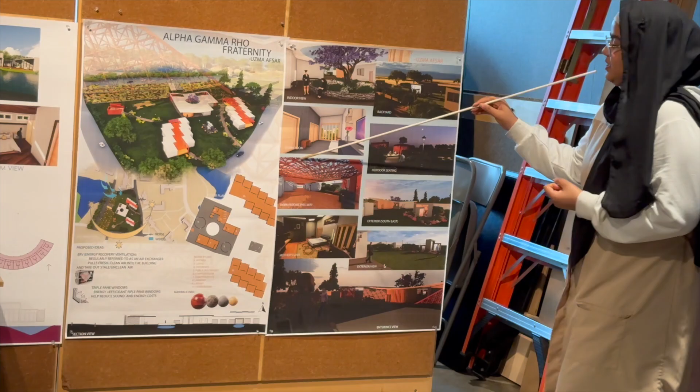So if you see here, this is looking out to the backyard. It's still an open concept with no doors, but at the same time it's closed enough so people can feel secure.

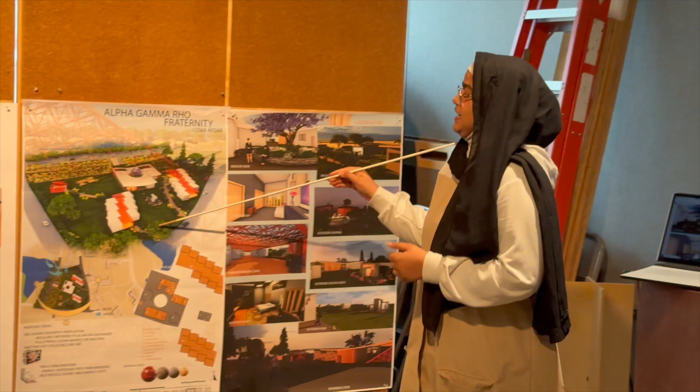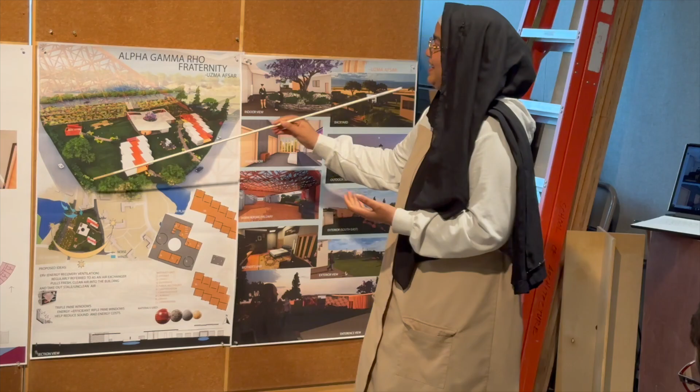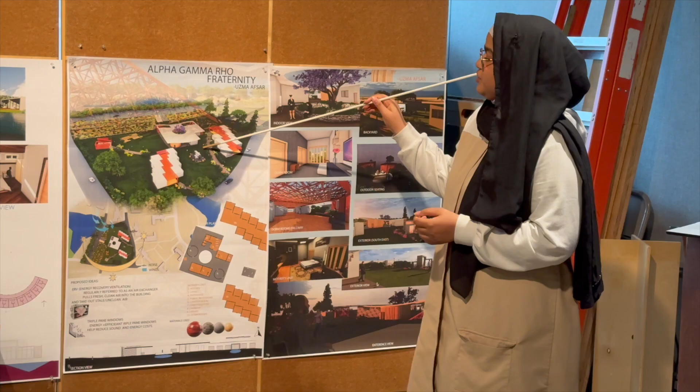With all this landscaping, I think it's hard to manage sometimes, so I also added compost bins here, somewhere I can't really see, but far enough so people don't complain about the smell. At the same time, it ties in with the gray water system we're already using.

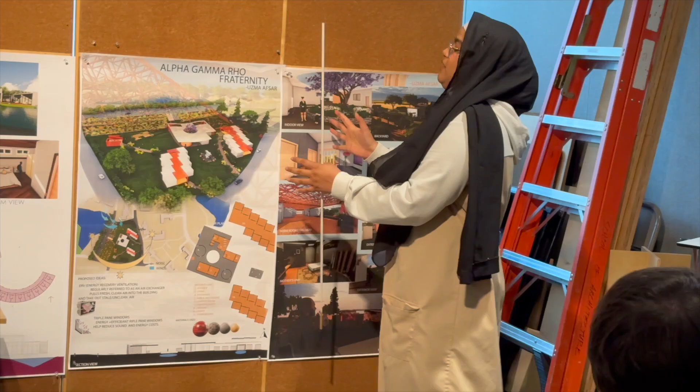Apart from this central courtyard, I wanted to create an outdoor seating area, which ties in with the same panels used up there for outdoor seating and events. It's a large space that can hold about 50 to 60 people, so it's a good way to separate from the whole structure and spend some time out there.

So these renderings are pretty dark here, but I think it's better here.

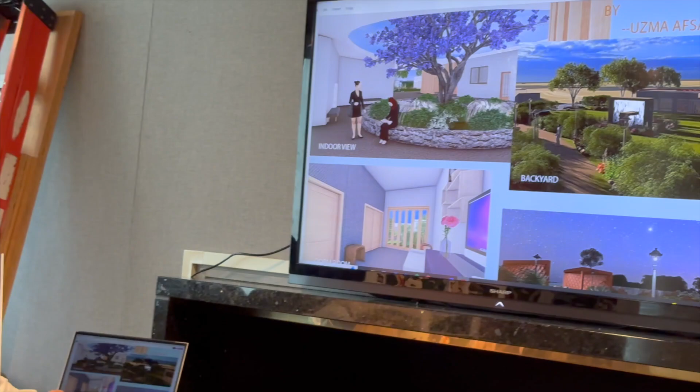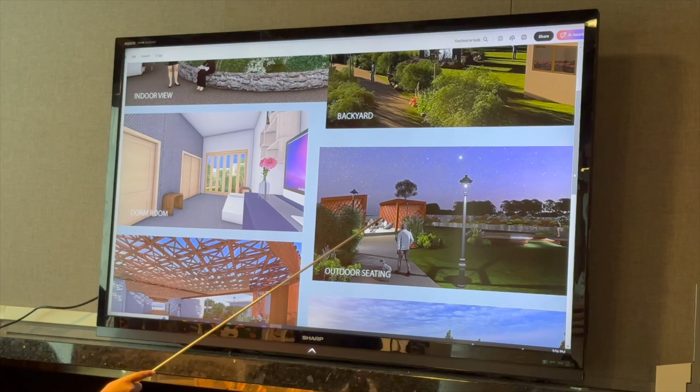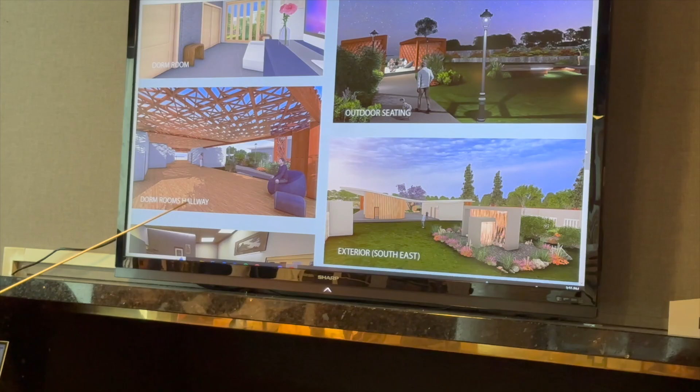This is a night view for the outdoor seating, which also has a snow roof on top with the same panels used throughout the buildings. This is how the hallway would look inside, same as outside. I think the geometric pattern, even though simple, creates nice shadows during summertime and sunsets—it's really aesthetic and without any extra cost.

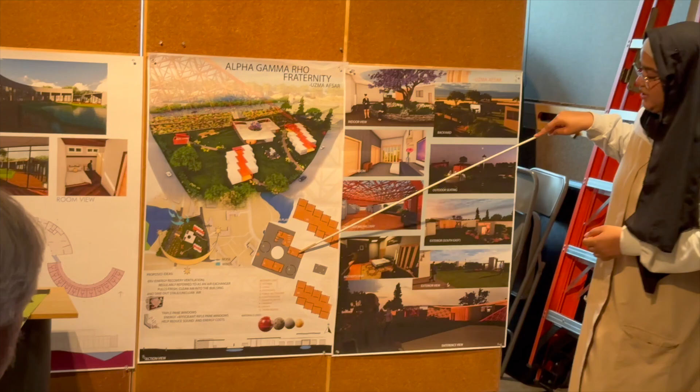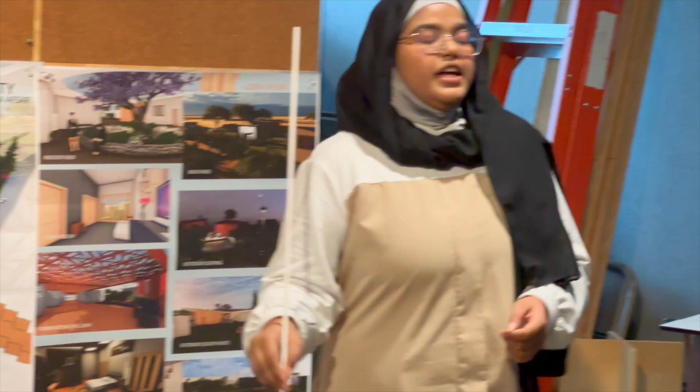This is the rendering of the mother's unit, which has two doors. I didn't use many windows here—just more foldable, open-style doors. So if you're inside and want to go out, you don't have to go all the way through; you can just go to the backyard. This follows through with the mother's unit here too, with two doors, and this is the interior.

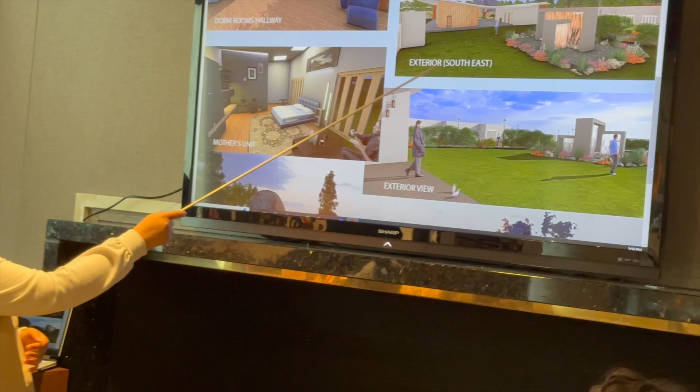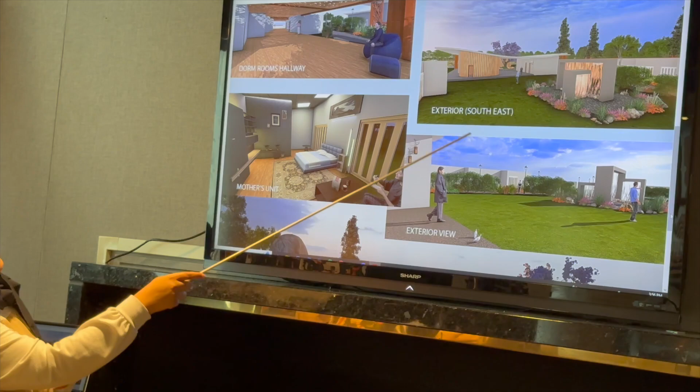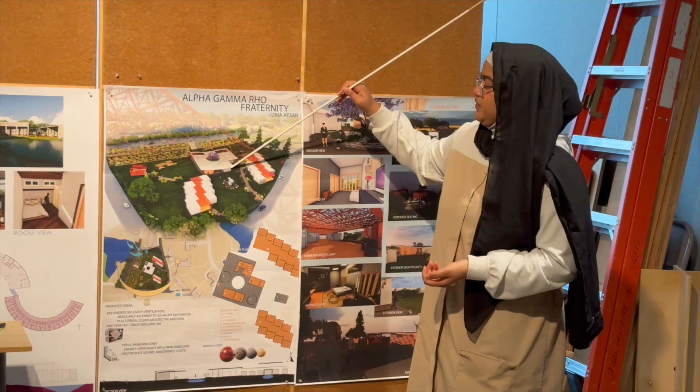That is the exterior view of the fountain and common spaces. I tilted the roof a bit because a single flat roof for all these spaces felt like too much, so curving it gives more drama. I also thought it would be a good idea to add solar panels on this side of the roof in the future, since most sunlight comes from here—that's a good angle for them.

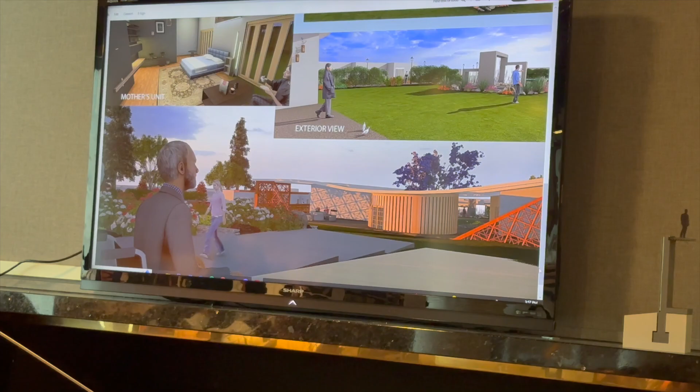This is a sunset view. As you can see, the shadows I mentioned create a nice drama here, without any extra cost.

So that is it. Any questions or comments?

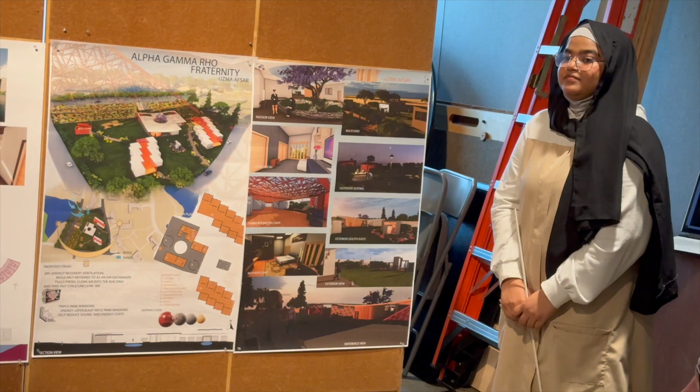Is this all open wood framing on the hallways? Yes, all of it—it's an outdoor space. I like the open nature of it.

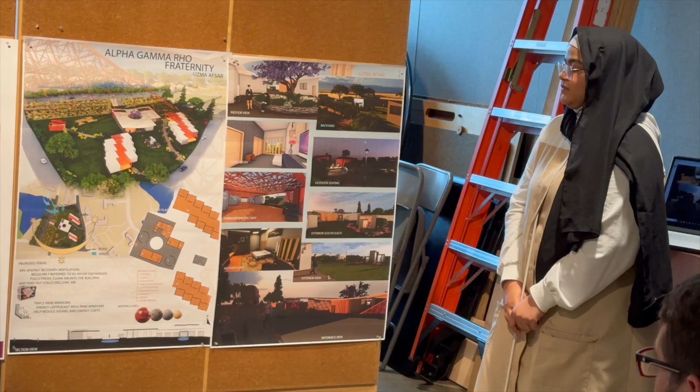One point I forgot to mention: all this area in between can be used as seating, and at the back there's a balcony for the living and dining area. If more people come into the dining area, opening this up would give extra space for more people to come in, but it's also outdoor, all the green spaces outside.

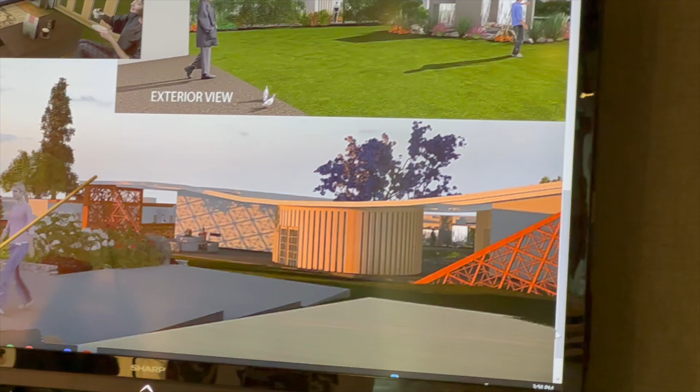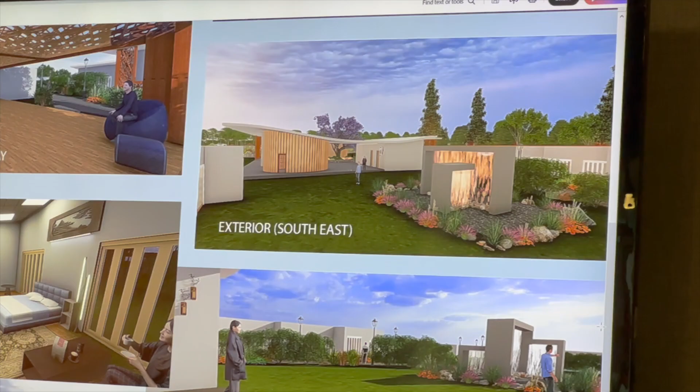This one? Yes, the roof is an overhang roof—you can see it here and here. It blocks some of the harsh sunlight coming into the building, but at the same time allows winter sunlight in, along with the winds I mentioned.

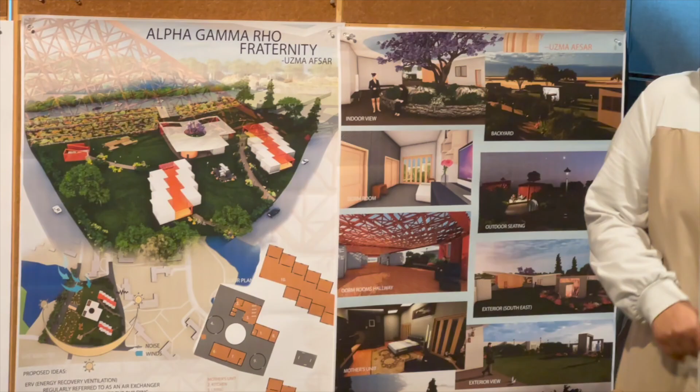During the warm weather, I think that's the problem. The summer will be hot. It could be, it's going to play a role. I think in winter most people won't go out as much anyway.

But having these open spaces does work to our advantage, letting winds come in instead of closing everything off. And the fact that they're not connected means you don't transfer heat and cool from one building to another.

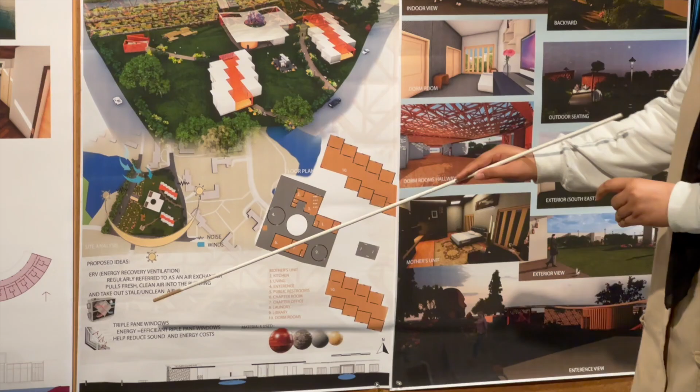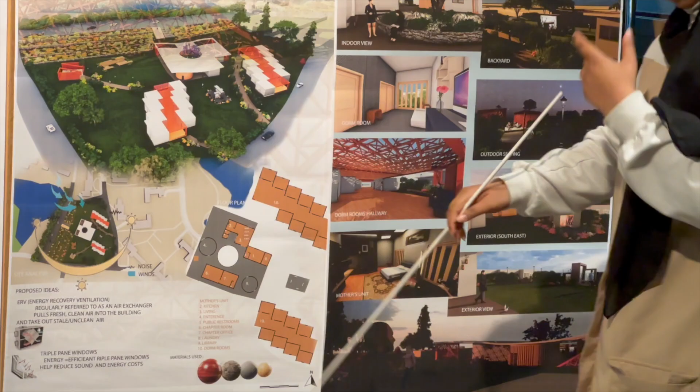I also forgot to mention these are just proposed ideas. Instead of HRV, we could use ERV, and for the windows I have triple pane glass. So most of the heat is taken care of during summertime, even with the doors.

It'll make a difference. Any other comments or questions?